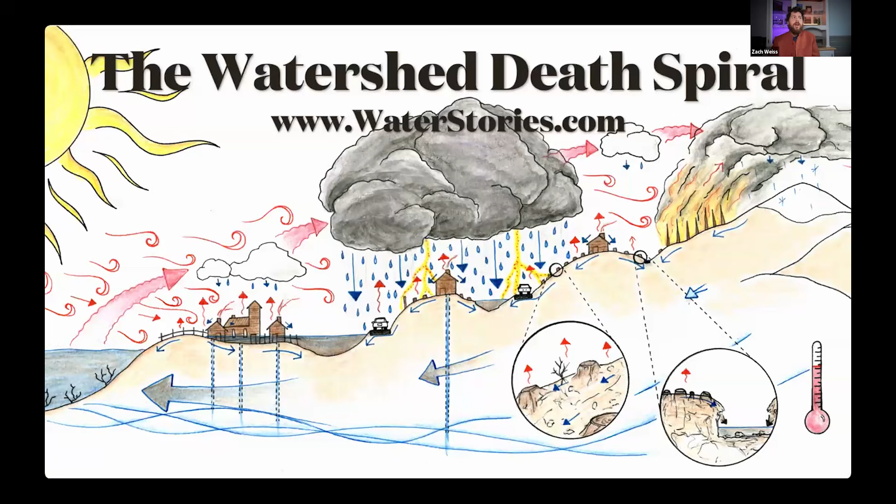With Water Stories, we're really working to empower as many people as possible to implement water cycle restoration. This is reversing drought, flood, and fire through partnership with nature. What this looks like on the ground is training people in in-person programs, in online programs, putting together films, videos, and stories. It's been really impactful to watch this community grow so quickly, represented all around the world already. It's because people are learning how to heal landscapes with water, how to work with natural resources to create more springs, more water supplies, more healthy landscapes, more habitat, to move from this watershed death spiral we're currently experiencing, these cycles of flood, drought, and fire, to a full, healthy, and functioning water cycle.

I'm really focused on helping people earn their living through healing the earth, something that all of these speakers here today are doing an excellent job of.

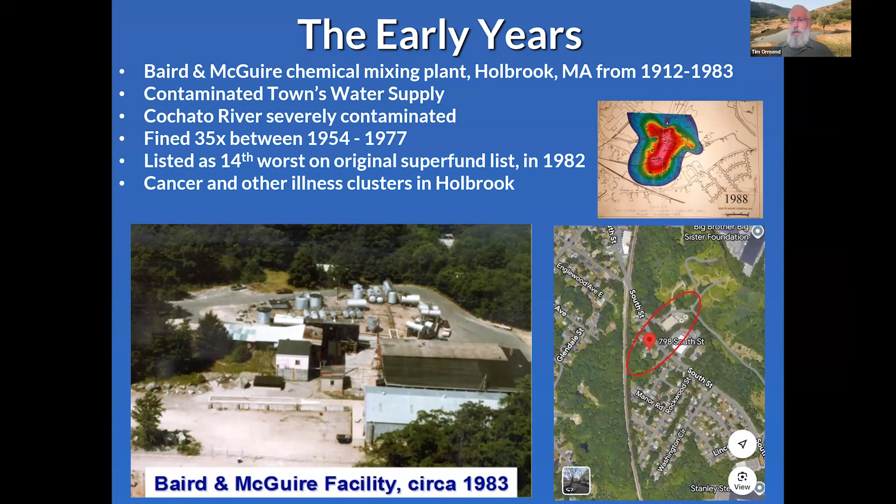And Patty Larkin wrote this song called Metal Drums about this story.

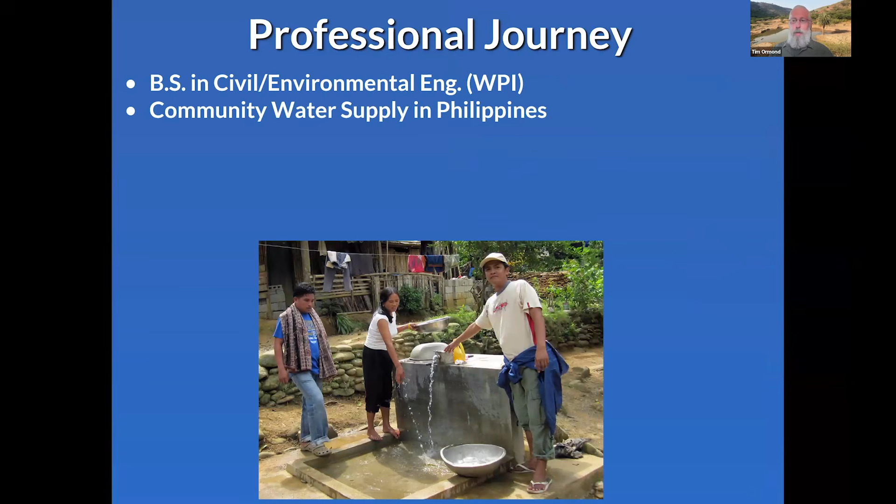Part of that, I think, led to my career in water. I was the first one in my extended family to go to college and earned a degree in civil and environmental engineering. I then had a real interest in doing community water supply work, so I did volunteer engineering work after my bachelor's degree in the Philippines, in Mindanao. That was going to be my career path.

I got a master's degree in civil and water resources engineering, and I focused my graduate research on developing countries and water supply. I worked with an international engineering firm, and then I got my professional engineer's license, currently licensed in several states.

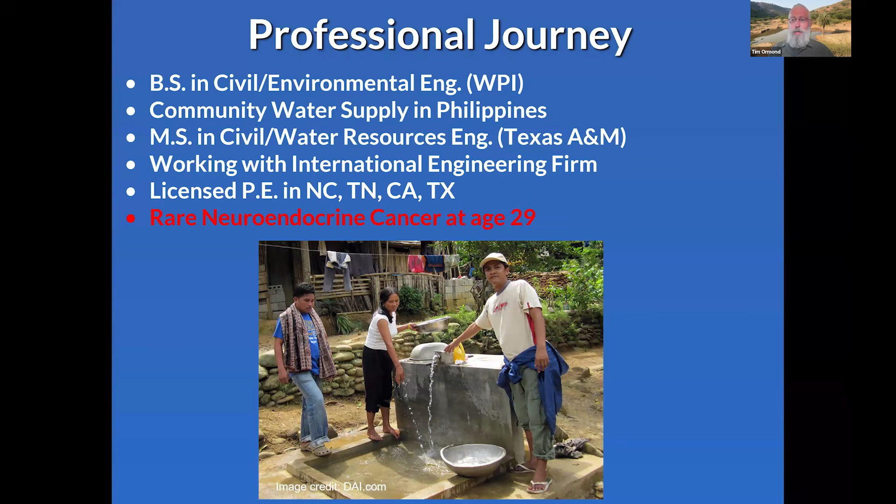And then I had what you could call a record scratch moment, where at age 29 I was diagnosed with a rare neuroendocrine cancer, and was told that the average life expectancy would be 2.5 years. So you might imagine that impacted me. I spent about a decade of my life working through that, trying to regain my health.

This journey of water can take you into sometimes low places and unexpected places, and for me it brought me deeper with water as part of my journey. I ended up moving to Asheville, this beautiful town in the mountains, considered a healing destination for a lot of people. So I landed here and started my own consulting firm.

Originally it was called Hydrocycle Engineering, then more recently called Blue Earth. I've had a focus on water and ecological restoration, mostly in urban environments. Zach and I talk about this sometimes—the needs in urban environments can be different than for rural environments in terms of design, permitting, and regulations.

Currently I focus on a lot of nonprofit work, helping environmental nonprofits locally and regionally with grant-funded projects. I'd also gotten certified in permaculture design and serve in various volunteer capacities.

In Asheville, I was elected chair of the Sustainability Advisory Committee, helping the city with issues related to environment and energy. And I'll talk about this a bit later, but I'm currently serving as chair of the Infrastructure Recovery Board. We had a major natural disaster here in 2024.

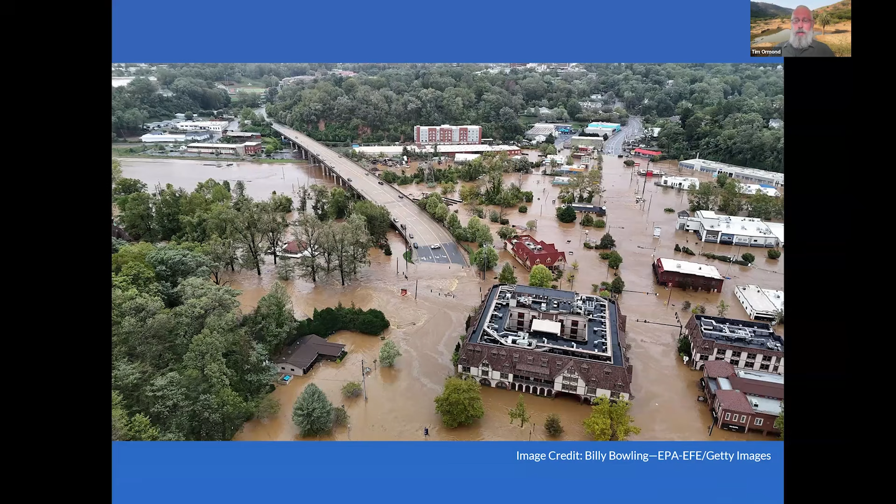In a crisis like that, you really begin to understand the importance of water.

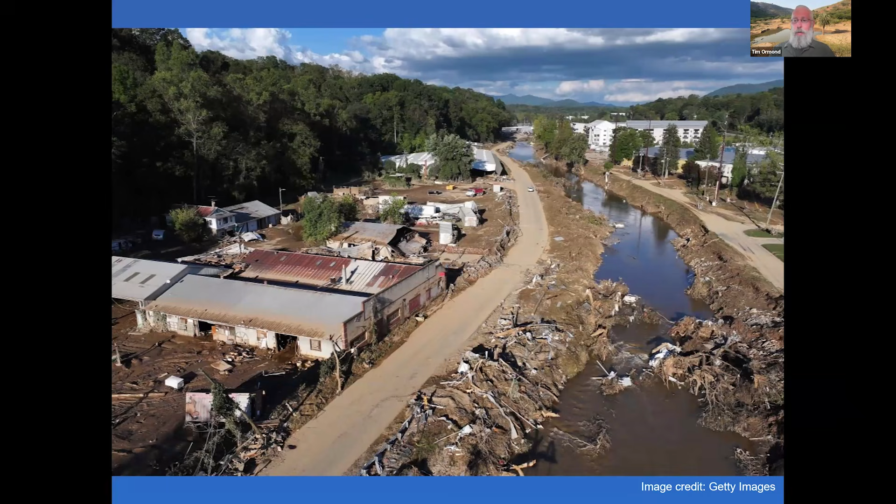These are some of the devastating aftereffects on the rivers and creeks. About 5,000 roads and bridges were washed out, including private roads and driveways. I'm currently serving as chair of the Infrastructure Recovery Board, helping the city plan its resources for recovery, which is still ongoing.

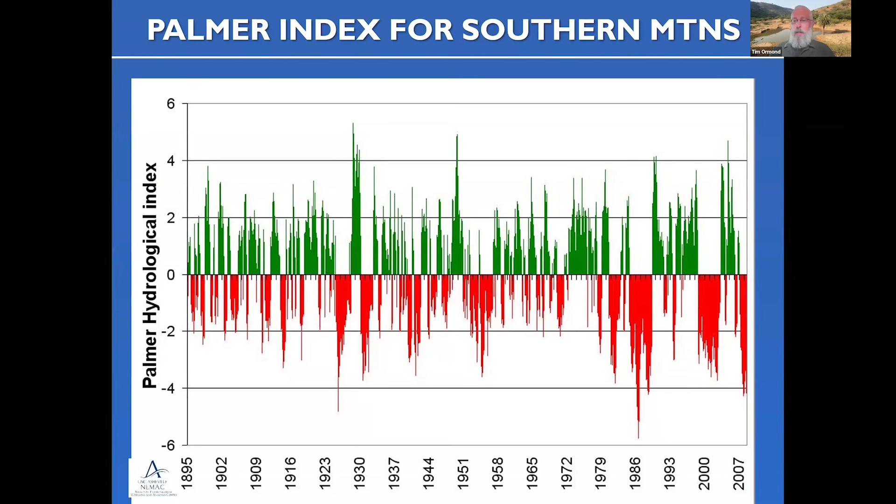We also have issues with drought and wildfire. They're not as common as out west, but every few years we do get wildfires in our forests. Over time, you can see these extremes—both flood and drought cycles—have become greater over the past 100-plus years, and they continue to intensify.

The Water Stories course really helped me integrate water and climate into my projects, and I wanted to share some of them with you. These are just a few current ones; there's a lot more I could speak to.

This one was a wetland restoration project. A film was made about it—I connected through Water Stories with Apollo Saldana, a local filmmaker also based in Asheville, and we collaborated on this documentary, which Water Stories has published. If you haven't seen it, I'd highly recommend it. I'm interviewed in the film as well.

This project transformed about an acre of underused asphalt parking lot at a local community college into a wetland education park, practicing water cycle restoration as part of the design. In urban projects, we often go through a detailed design process involving engineering, permitting, planting plans, and detailed hydraulics. Working in an urban landscape is different—it's not for everyone, but it's an important niche since so much of our world lives in urban and developed areas.

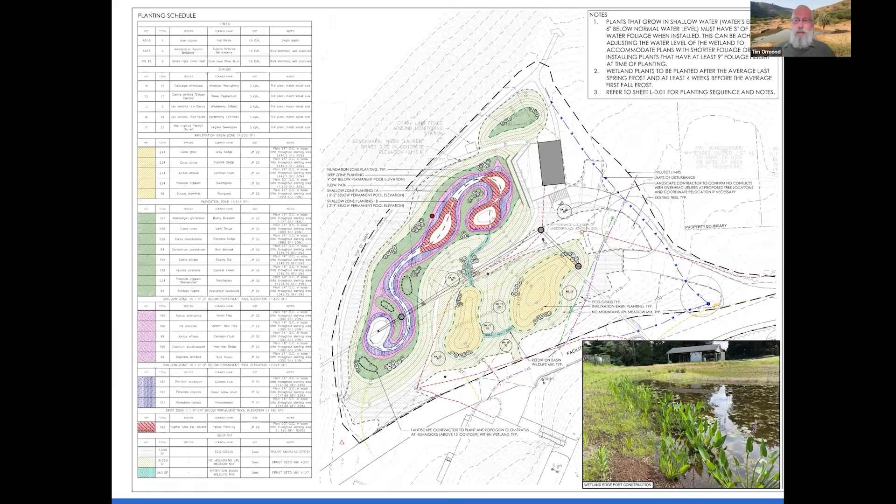This part was unexpected too—as we began excavating and uncovering the soil, we discovered it was contaminated. Truckloads of soil had to be brought to a special site for remediation.

The project will be moving into phase 2, which will involve a permeable parking lot and a teaching area. We'll be working on that design in the coming weeks and months. Here's the before and after—unpaving a parking lot and putting up a paradise.

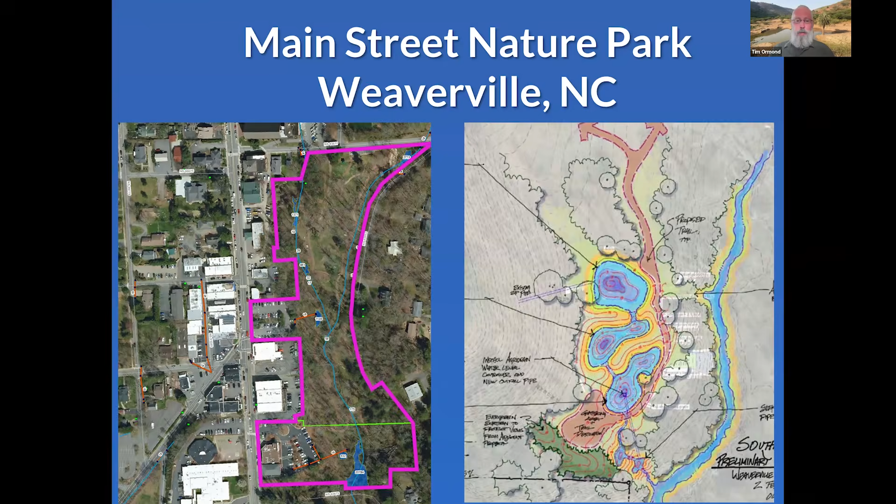Another exciting project I'll mention briefly: I'm the lead author on a community guidebook on water cycle restoration. Our current title is 'Water Connects Us All: A Community Guidebook for Restoring Mountain Watersheds.' It will have a lot of guidance, design guidelines, action plans, as well as some model policy templates that communities can use. Our hope is to really engage many different communities, including the climate action community, in water cycle restoration in our region. This will be published later this year, and we'll be sure to let you all know.

Something that was really profound for me, I'm still trying to make sense of what happened exactly. Back in January, a good friend who lives in Bangalore, who grew up there and I know from Asheville, and I had planned a trip to visit him. I'd never been to India. So I booked this trip, and then a few weeks later, Zach at Water Stories announced this Water Sutra, and it just so happened to fit exactly within my existing trip. So I said, this must be for me, and I signed up.

Part of my India journey involved about 2 weeks in Rajasthan with Zach and 30 or so people from around the world, walking with Rajendra Singh, who's known as the Waterman of India, and his organization Tarun Bharat Sangh, which I think means Young India Movement.

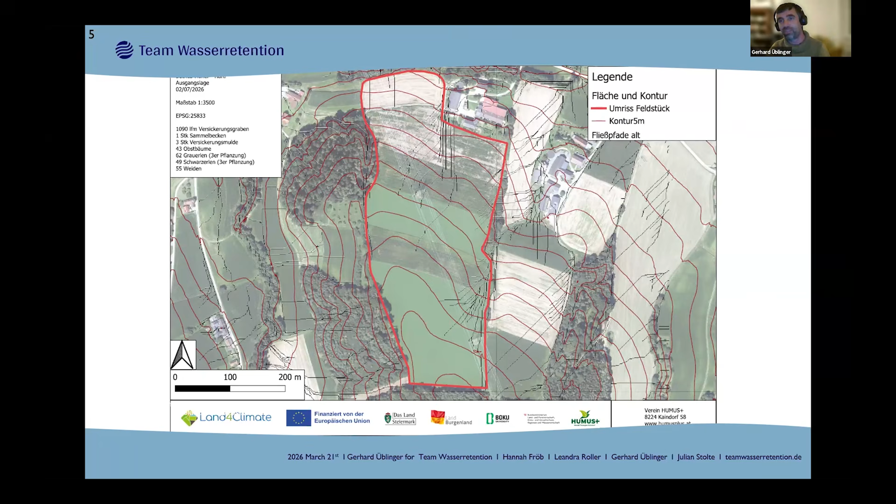After finding out all this stuff, I go to the next step and try to integrate these keyline structures in a way that, when the farmer sits on the tractor, he wants to go straight forward and not turn around quite often, he doesn't want to stop. He just wants to go there and back, there and back. If it's straight, it's easier; if it has curves, it's a bit more challenging. But the most important thing is a long way down and a long way back. So when I do designs, I try to even make the long way down longer for the farmer, so it's more practical for him.

In some fields, like here, you can see it — when you follow the contours, you get a different shape of the parcels, creating this longer way down and longer way back. So it's sometimes even more effective for the farmer to go these curves than to go back and forth the short way like he did before.

As you can see, in the bottom is the top of the ridge, and next to the house is a small creek taking all the water. So we try to really start at the very top and harvest all the water flowing down, bringing it down to the ridges where we create small infiltration basins also. We decide where we allow this water to overflow the swale — not everywhere, because we want to steer the water where it's needed. We try to get it out to the ridge, away from the places that are already wet, and spread it as wide as possible.

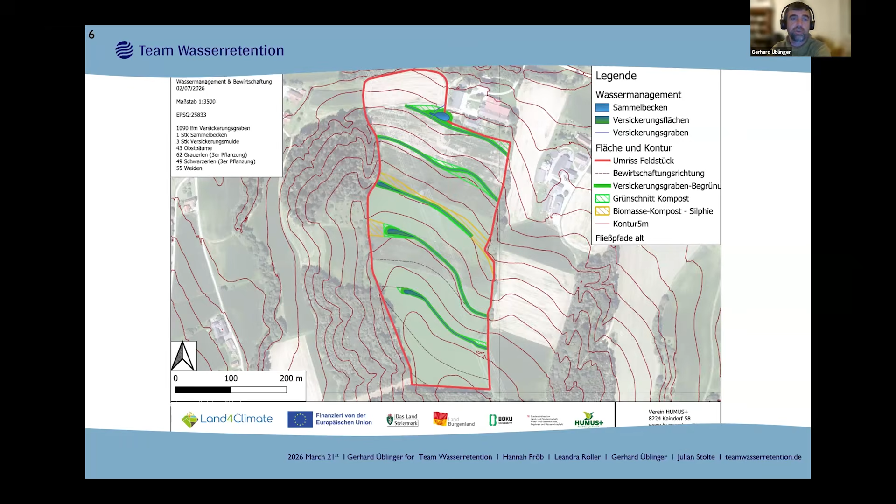And in the bottom, there's a small permanent water body. You will also see how it works. And after this, we plant the berm trees.

So this is something quite common. There's different plantations. Next to the house, often we use fruit trees, a bit further away but in good reach, like chestnuts we have here, and the rest is fiber trees and trees that create energy from them.

So here you can see also the gas pipeline going through.

So all these structures are aligned. We have this key line structure that is practical for the farmer to mow, but still it uses 5 to 15% of the field, of the area. But it's productive because there are the trees. And this combination is interesting for the farmers.

The implementation is costly, more costly than just farming. This is true, but it has a return for the farmer himself within a time period of 20 to 40 years, depending on the trees.

But for the whole economy of the state, this system replaces itself within few years. So when I do my research, it says between 3 to 6 years. If we would put this on all the farms we have, the devastation that is not taking place via floods, via lost fertilizers, via lost soils, would repay this within few years. So there's a very clear use case, a very clear business case in it.

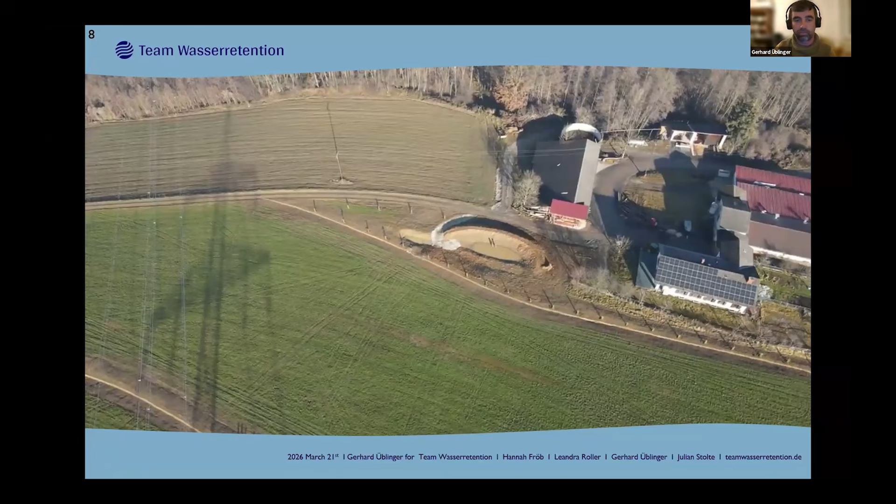So I will now be a bit faster. Then there's another one that I would like to show. Maybe you remember, we had this 4 years ago already in a Q&A when I asked you if it's possible to build a pond down there.

And they had a mudslide coming in. There was a heavy rain, we had this mudslide coming in, rushing through here. And here on this small ridge, they had a drought situation where they couldn't plant fruit trees because they were all dying in the sun. So the aim now was to get this excess water to where it's needed.

Back then when we talked about building a pond here, it wasn't possible because all the water needs to rush through here. If you don't get rid of this water, building this pond would need a spillway so big that there wouldn't be a lot of space for the pond itself.

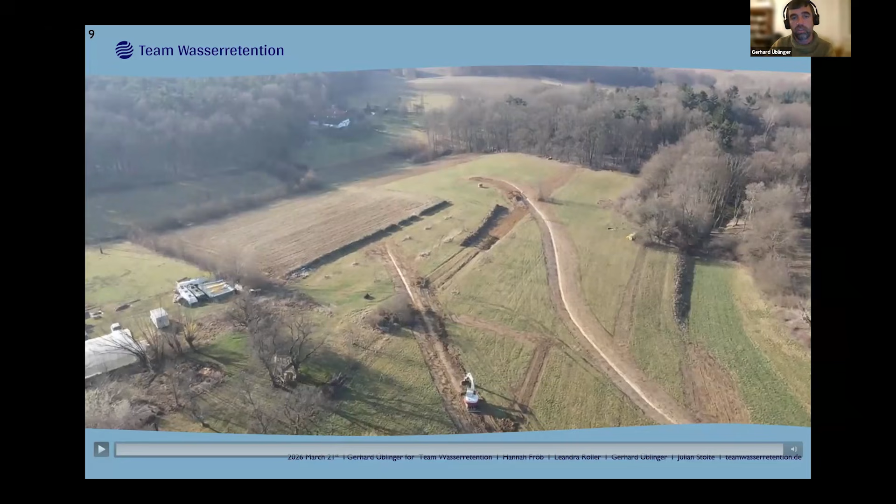Also here, this whole system—let's go back again—this whole system was built within 4 days. So also here we tried to really be fast and get in and out, to also not disturb the agrotourist season for them.

And here there's another flight just to make visible how the swales look after implementation. So we now fly along this contour level swale. As you can see, there are marks for the digger to drill the holes on the berm. And everything you see is like cut, loamy topsoil.

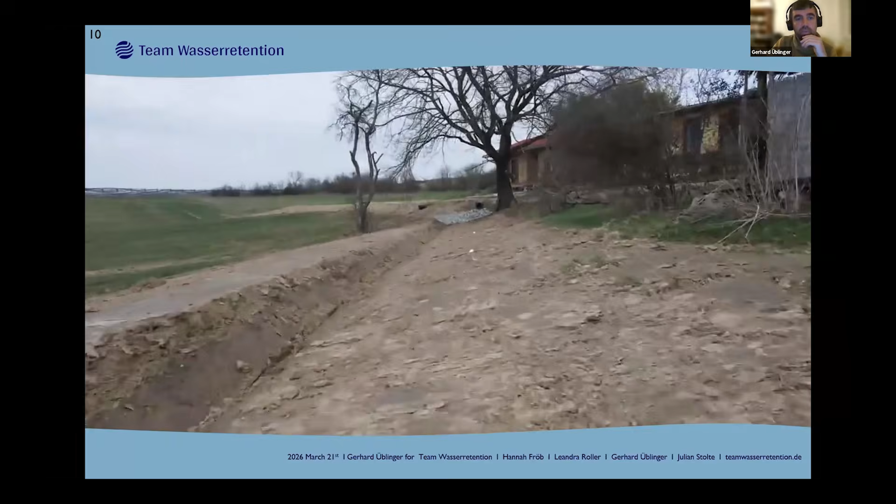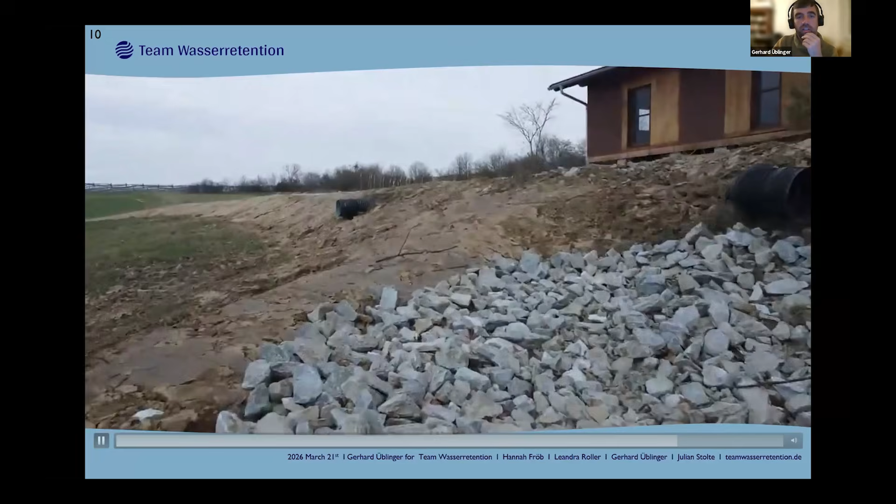Right, so these are the big scope projects that I do. And it's also a webinar for people trying to understand if the Keyline Course is the right thing for them. I couldn't imagine doing a project of this scope so fast. So for me, it also was like I need to get into this, and there was a lot of learning on the way. The learning curve was very steep in the last 4 years.

Like whenever I wake up in the night, I have something to think about. So if you don't want to have it that steep, I can understand it. I just had this luck, and I had to take it.

Before I came into this lucky situation, I was also working with a different skill that I brought from my past. I was working with kids before. So I decided I want to also do something else that is more on the social level, which is also teaching people what we need in terms of water and land use.

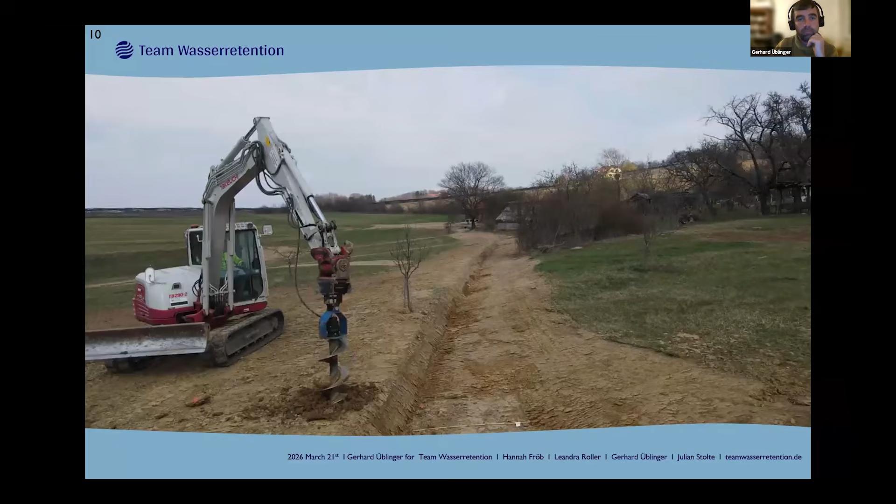So I started dam-building workshops with school children. Most of the pictures come from the school that my son went to. So I had a perfect situation: the land is ours, where the creek is flowing through, and I had the pupils that were my dummies to test whatever experiment I did, and they loved it.

They just loved it. We have a small sawmill in the neighborhood, so we took the rest from the sawmill and just built something somehow into the river, into this creek, and the children had big fun.

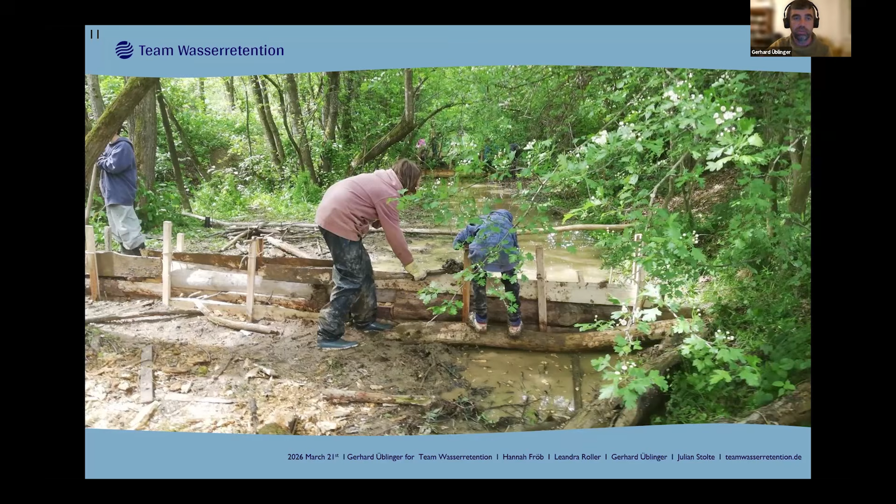Unfortunately, I don't have a picture of how it looked after the first strong rain, because all these structures were washed away. So after seeing this, the class came again. We said, okay, we need to do something else, this doesn't work. So we continued and started building this small-scale beaver dam-like structure, just putting piles into the ground and weaving willow branches into it, trying to find out what happens if you do it like this. Will it be washed away as well?

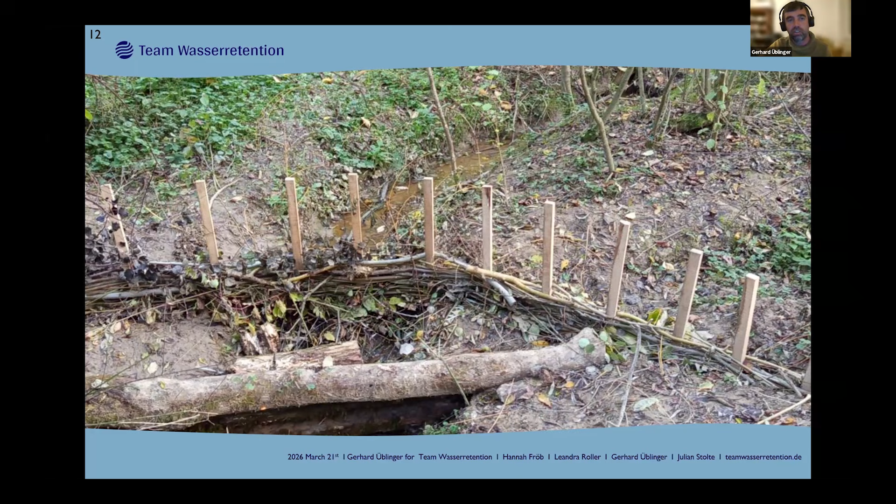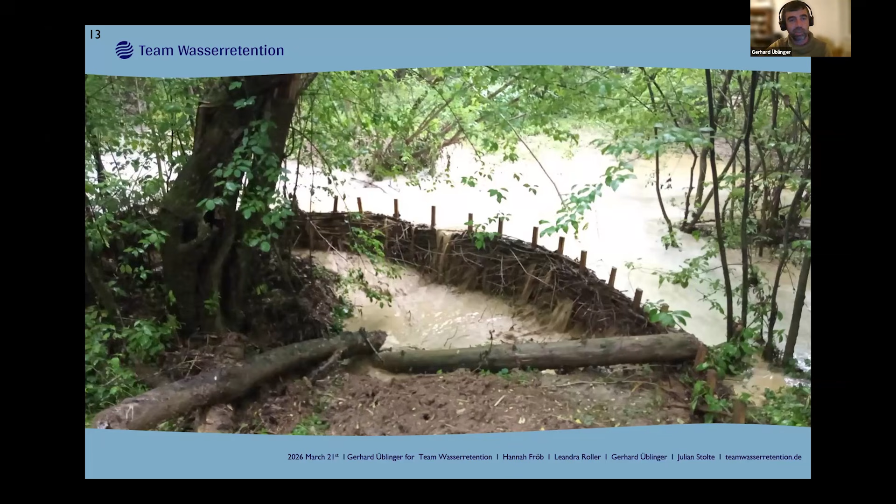So we had I don't know how many tons of soil lying in the back. The children were stepping through with their feet, getting stuck, losing their boots in the mud. And so we could really understand together, okay, this is what is happening when it's raining and we have erosion. Soil is washed away, usually we don't see it, but here you can see what is happening.

The structure is still there, it's still doing its job. And the very interesting thing is that it clogged more and more, so now we have a kind of wetland situation in the back of the structure. There is mud and different vegetation starting from scratch.

And so we built more and more of them. Whenever I go there, sometimes I see children coming around the corner, curious what has happened to their dam. But not only them - I also started showing this to people from the local government, like the mayor, and them seeing what happens there and how simple solutions can be made led us to come up with a project together.

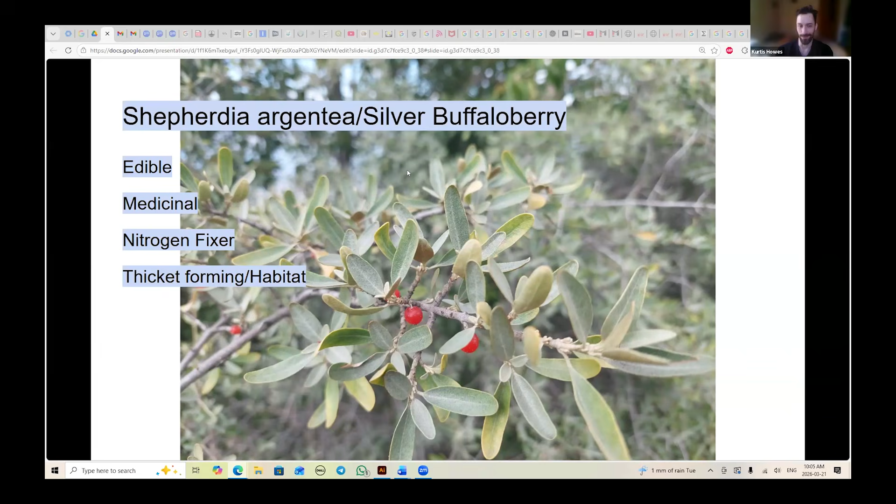As I was going through Alberta, I came across lots of cool plants. This was Shepherdia, or silver buffalo berry, and it's one that I've read about a lot and would like to implement in projects here, but I feel like it's too wet for it here. It has tons of cool benefits - edible, medicinal, fixes nitrogen, forms thickets, habitats, and you can use it for food and jellies, and you can make like an ice cream type substance with it.

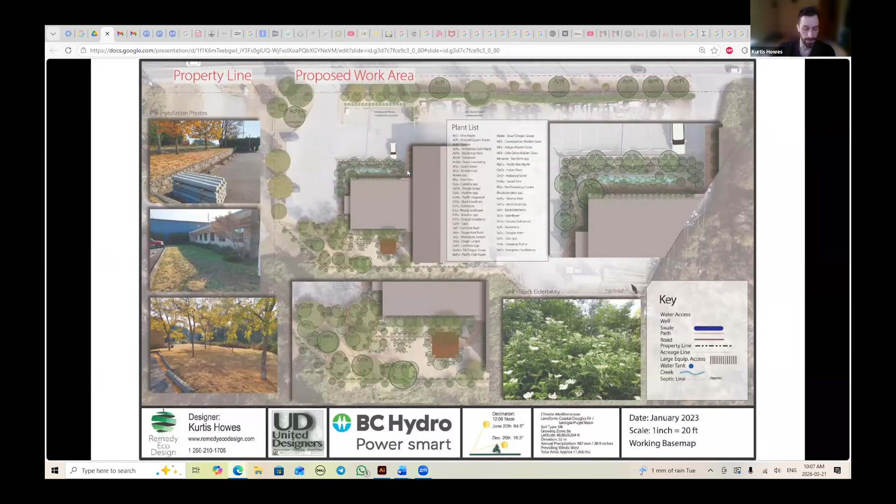This was the first project I started to implement water systems into, and I just started small. You can see there's a small rain garden on the right, and a bunch of native plants within that to try to build up the ecology of the area.

In 2023, they were forced to stop using their water because of some licensing issues. Eventually by the end of that year, they were able to use their water again, but they were told to stop in summertime when they needed it the most. I read about this in the paper and decided I could help them try to catch and store water on the land instead.

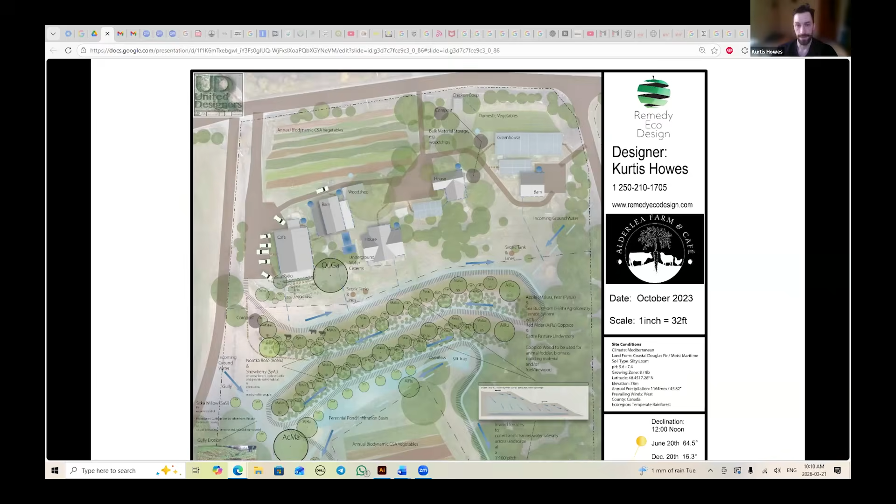This is the other half of that. I also recommended having a hazelnut and honey locust coppice agroforestry system, that they could utilize the wood for building fence posts or other structures, or use the hazel as tree fodder for any livestock they have.

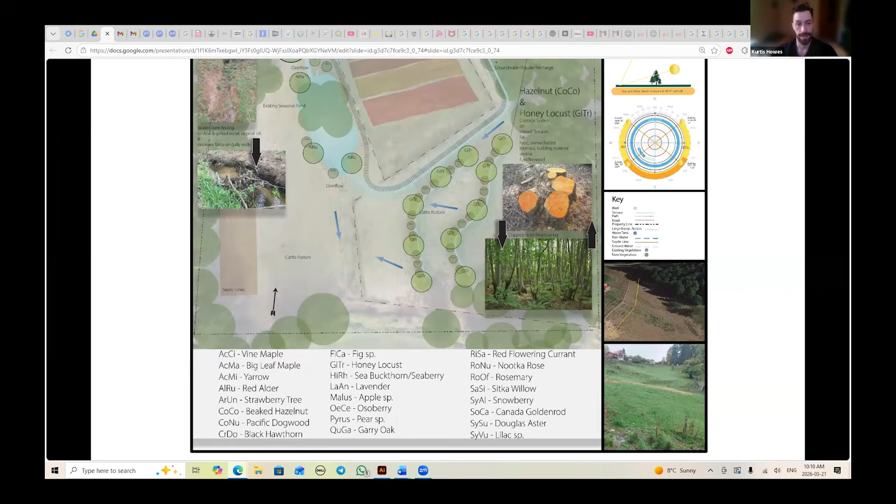After this, they applied for a grant to do a dugout on site, because they haven't installed the terrace system I designed for them, but they have installed this dugout. After I did the design, they applied for a grant, which they got, and I did the specs for the dugout. It's a lined basin, and it's totally full of water now, so they can use it to irrigate their crops in the summer.

Hopefully in the future they'll implement the terrace system I've designed as well. This is just more of a close-up for that.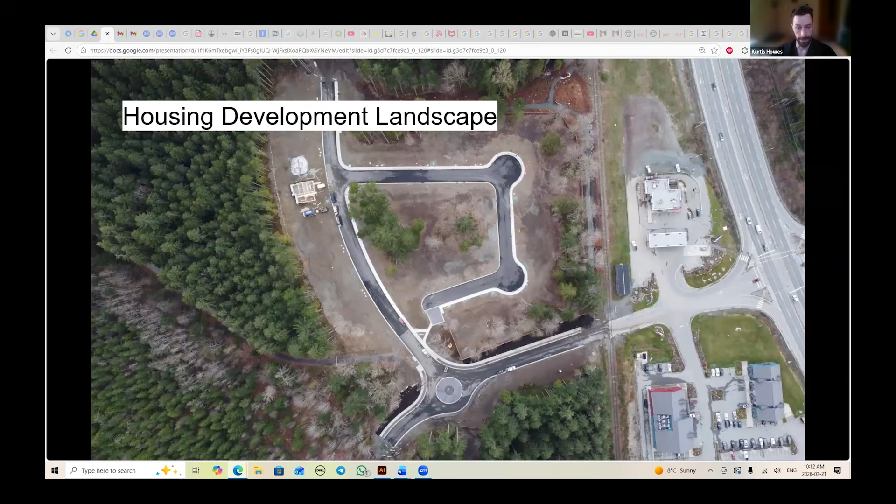Moving on, this is a housing development project I've worked on. This has since been constructed a lot more. There's still some spaces that haven't been built yet, but there are a lot more houses in here now. I did a design for a little entrance corner space, using primarily native species, and certainly boosted a lot of the beautification factor using magnolia and flowers and stuff like that too.

Anywhere I can, I always try to incorporate some sort of water body, even if it's a small retention basin or rain garden. I have that listed in this design, but I find it's sometimes hard to convince people to implement these things if they already have a set idea or don't have an initial interest, because sometimes they're like, what's the point, right? So a big part of what I do is talking to people about the importance of even small catchment systems and the amount of habitat they can create, let alone the rehydration ability they have.

So, designed this. Unfortunately, they did not go for the rain gardens, but it's okay, we still put in the planting scheme, and I think it turned out pretty nice.

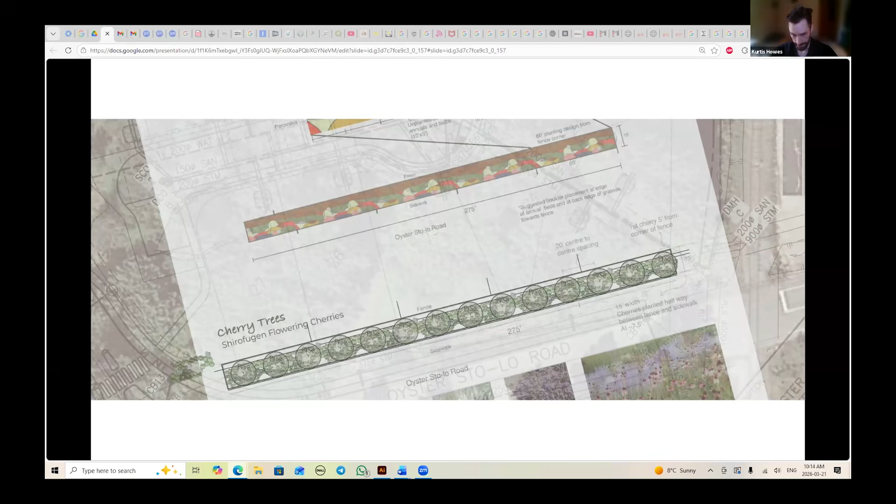So this is along the entrance way in, and this is the planting of that, which I think turned out really nice as well.

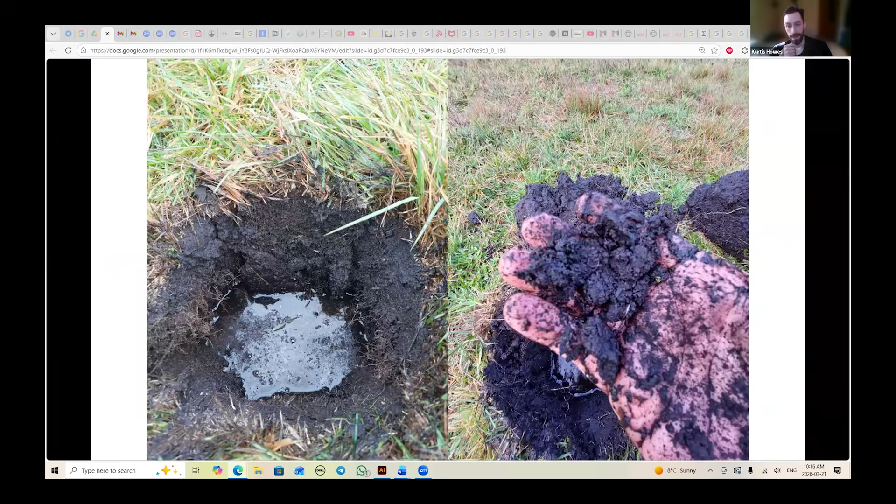So I designed this Chinampa-style food forest, which she wanted, along with some more row planting or agroforestry type systems. The blue lines on the right would be the channels to excavate, to hold water and slowly drain it into that marsh land already there. But there's so much in the winter, it would just be standing water anyway.

Then I'd take that excavated material and use it as mounds to plant into, to keep the roots out of the water. In the back right, I used a lot of plant species that can handle more inundation, like crabapple, for example, that we could graft more palatable or larger cultivars of apple onto. So I could leverage the use of a wild apple species and then graft a more edible species onto that. So yeah, this was fun.

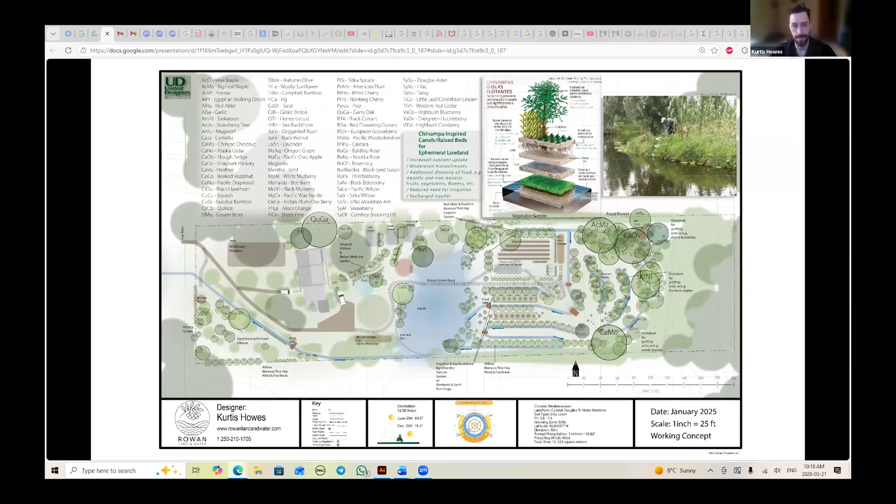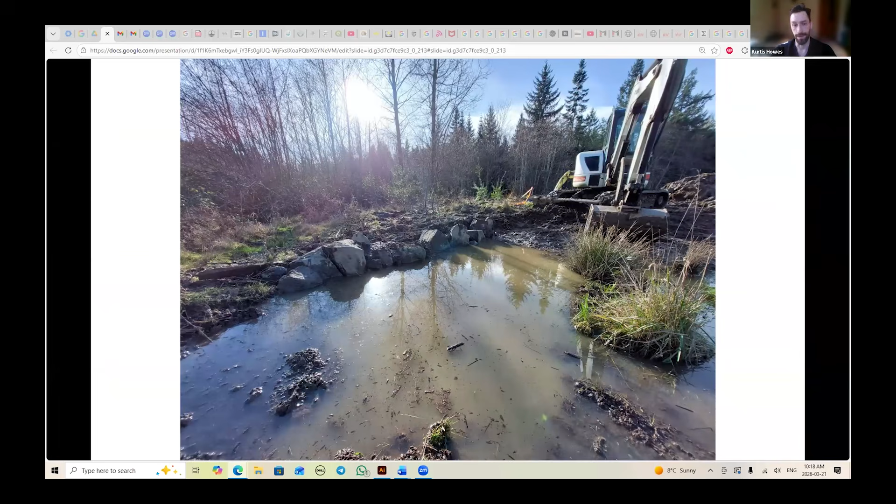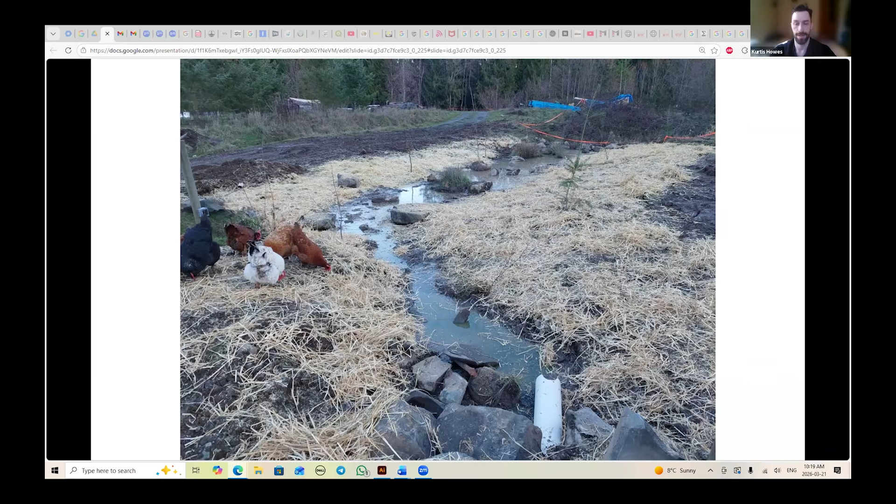And then here's some excavating work I've done. This is a small filtration system fed water from a building nearby, and I put in this little rock check dam to hold the water back, to filter it before it enters a pond further downhill. Then I mulched the edge, seeded it, planted conifers and alder to help shade the water, keep it cooler, and build up the soil as well. That was fun. Here's another photo.

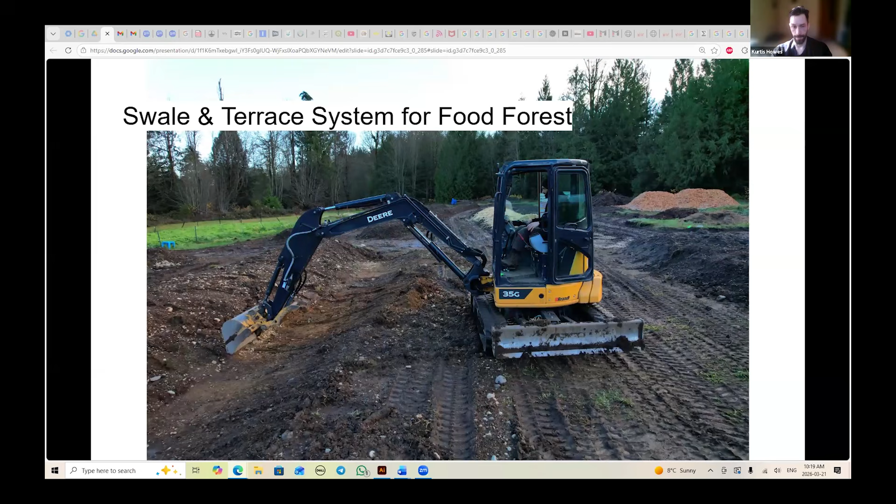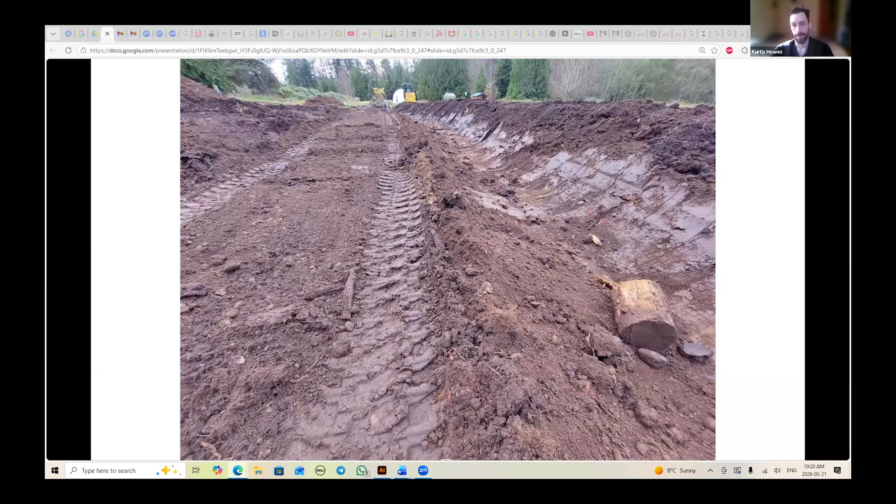And then here is a swale and berm system I worked on for a woman. This project started out with them hiring someone to place the mounds, but they actually weren't fully on contour. So I went in and shot the site with my laser level and saw that a lot of these mounds were off a bit, sometimes up to a couple feet. So I fixed that by marking them out and recutting each little channel before the mound, actually on contour, so it would hold water level and hold it better and not let it run off so quickly.

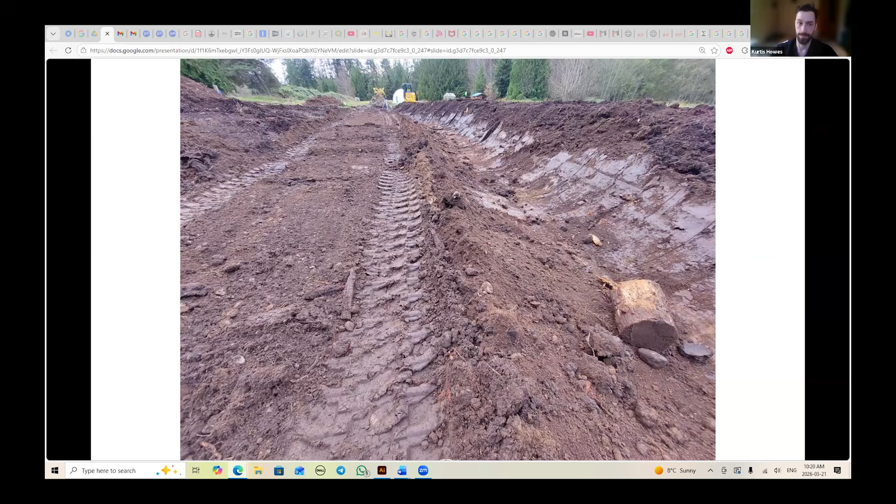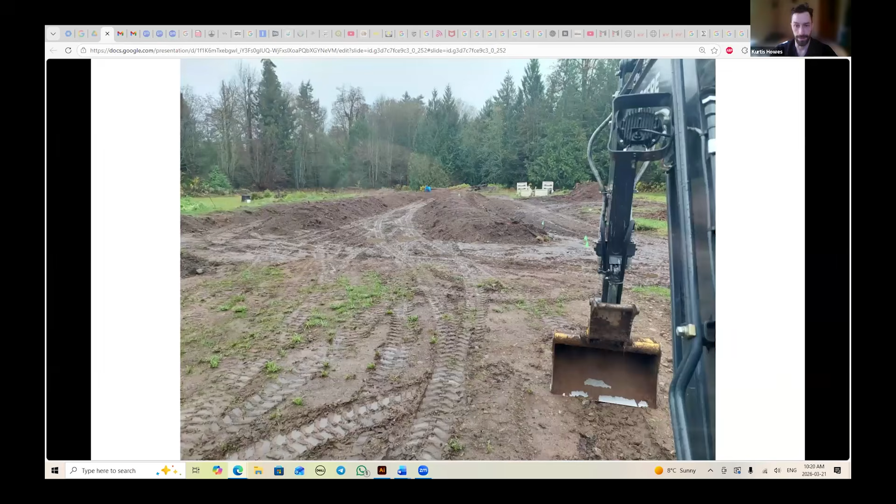And then I used the overburden on top of the mounds, as well as built up the actual roadways, which you can see on the left, because they were quite sloped before. I wanted to level them out and create more of a terrace system and an access point for each swale mound. So here's some photos.

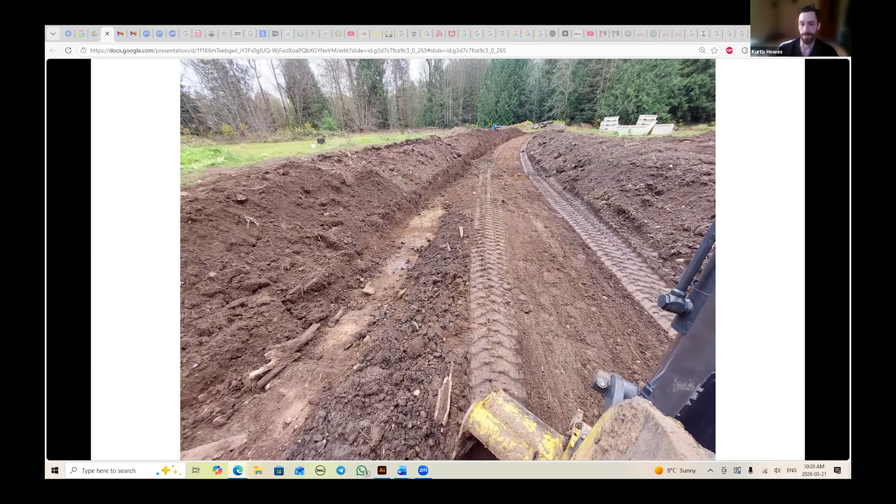One of the biggest things on this site was seeing how tight the space was. Since I didn't place them initially, I saw the importance in planning ahead and always giving yourself enough room for access, especially if you're going to use equipment. Because between some of these mounds it was so tight, and I wasn't able to do a very big channel before the mound, and it became frustrating at times. I just realized the importance in planning ahead and giving yourself ample space if you have it.

Here's one of the channels after rain, and some of the soil and manure that we were adding to these mounds to plant into. Sierra designed this system that I was helping to fix up a bit, and here are the spillways for each of these channels as well.

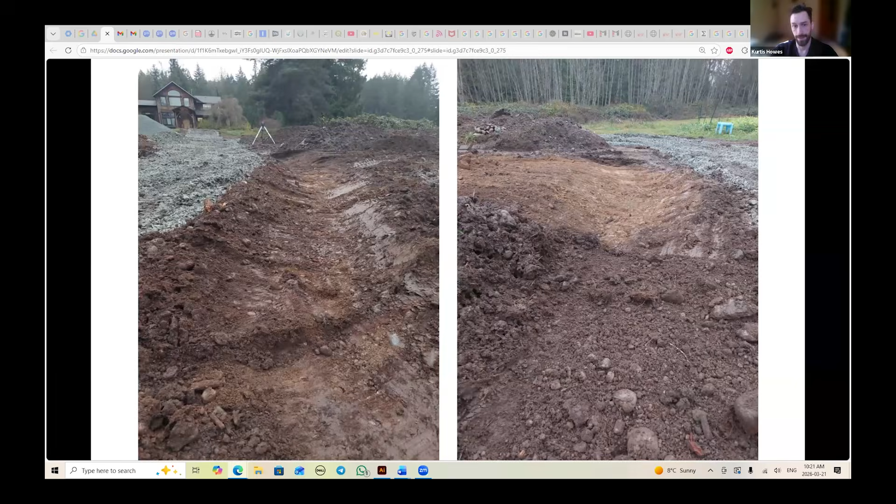So we cut in a level sill and ran the spillways down alongside the road. My portion of the project ended here, but I let them know to fill these up with rock to keep the spillways from eroding, and also to give them somewhere to access, drive, or walk across. So yeah, that's that one.

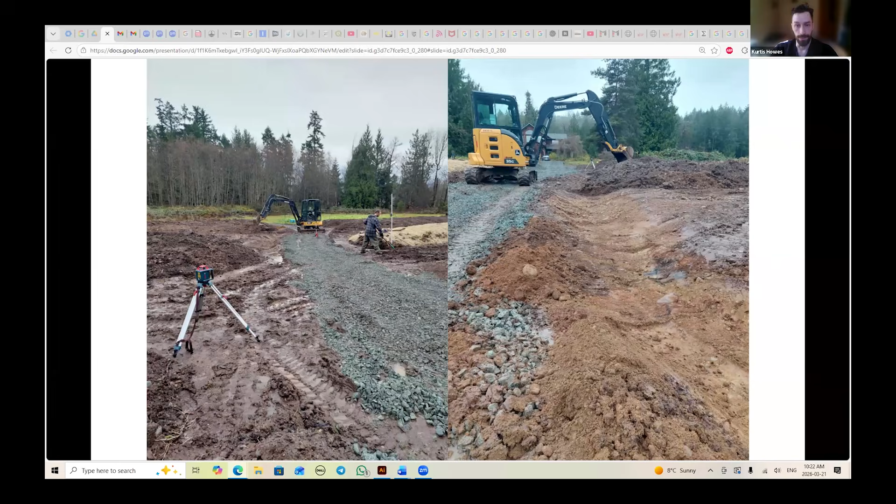Here's some more photos of the channels filling up a bit with even just a little bit of rain, so holding water, which is good.

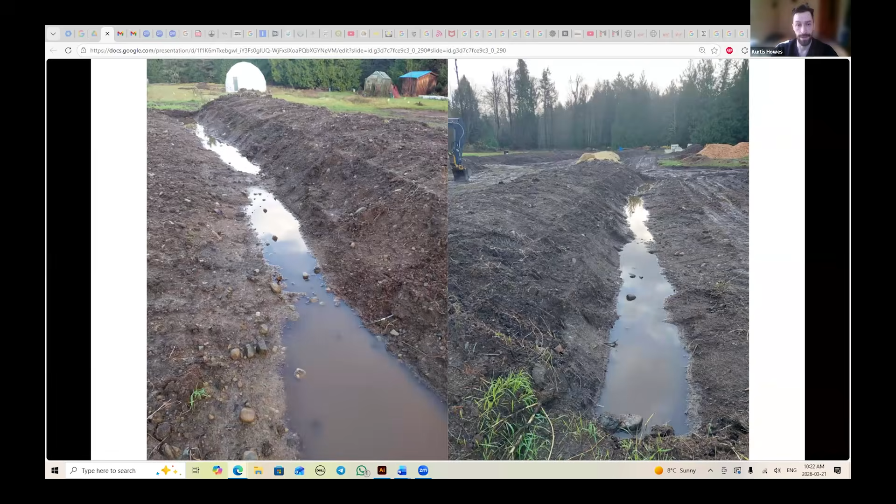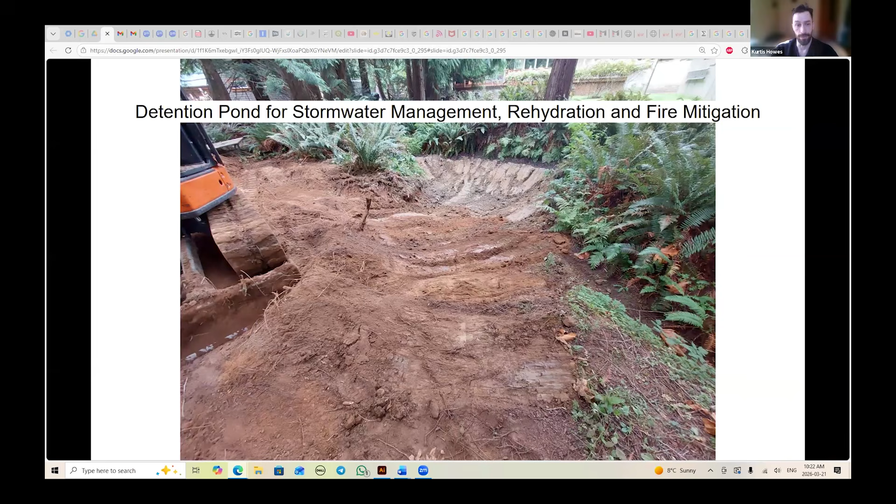Moving on, here is a small detention pond I put in for stormwater management, rehydration, and fire mitigation. This was just a fun little basin I put in that was fed by the house you can see in the background. There's a pipe running off of their roof that catches rainwater that flows into here, so it fills up really quickly after even just a little bit of rain.

I then used a lot of the overburden to build a little road through the woods, because the only access point other than this was a little walking path on the left. I just wanted more space and to get the machine through more easily, plus I had a ton of fill to use. So I figured I'd just make a little road, which is always fun.

It filled up approximately September 26th, and held water, then dropped around 2 feet approximately August 6th the next year. So it stored water for around 9 to 10 months of the year, which is great, because otherwise it would have just run off, exited the property faster than it needed to.

It would have alleviated—it wouldn't have given them the fire protection that they were desiring. So I think that's cool. This only took a few hours to do, and it's that much more water just being held in the ground. So yeah, that was really cool to do.

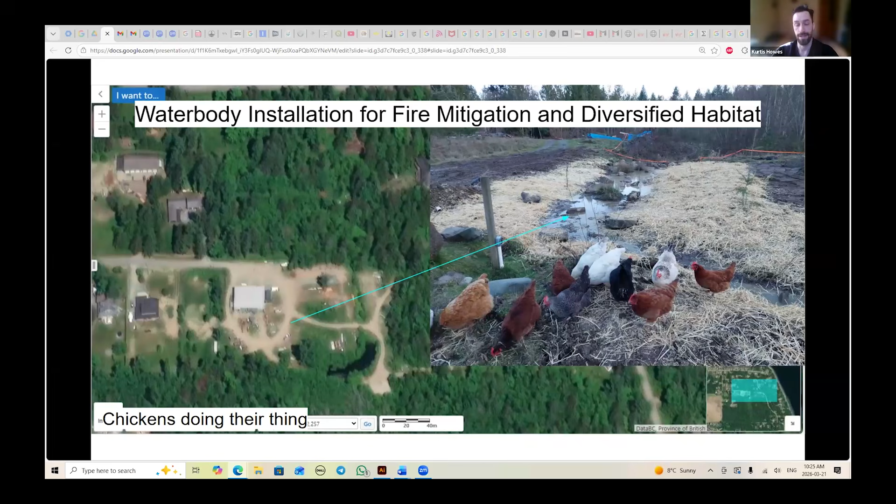The ponds at the bottom right of that image overflow into the pond that I put in the next slides here. So we intercepted that ditch and drainage system, and instead put a basin in so it would hold that water.

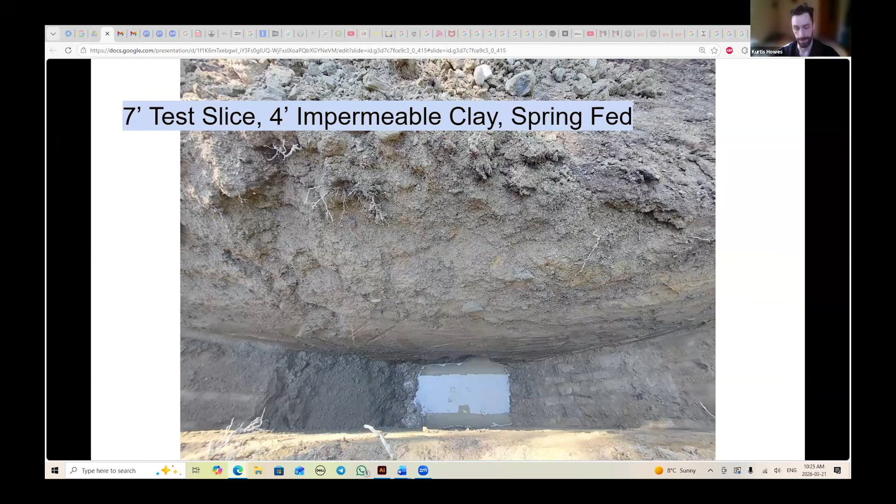When I started this, I dug a pretty deep test slice. It was about 7 feet till they hit bedrock, and there's a solid 4 feet of impermeable clay to tie into. So it was really good material to work with, and I knew there was good potential to hold water on site here, plus there was a lot of water moving through it already.

We started with building a silt trap that the ditch from the other property runs into, so we intercepted it to catch any silt and contaminants before it hits the pond that we were installing.

Darcy was working with me on this and was amazing, just went full bore the whole time. It was just him and I doing this project, and it was great—a lot of work, a lot of fun, super hot. I think it turned out really well.

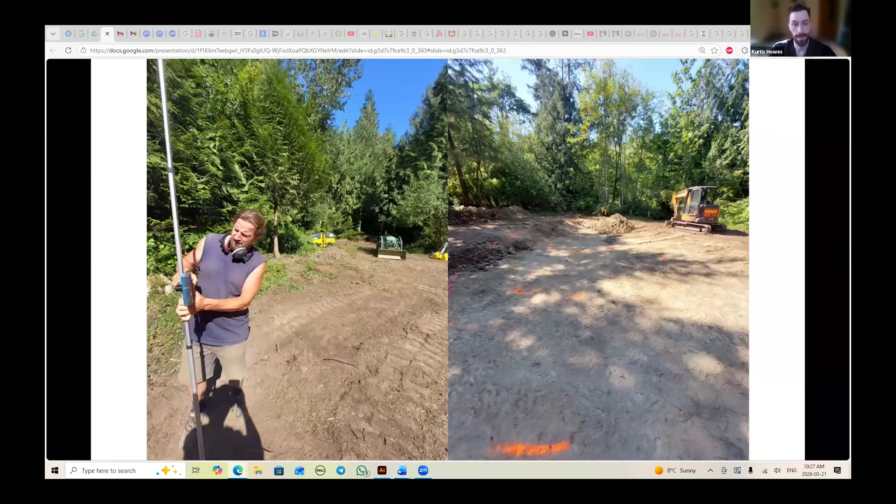A lot of marking, just kind of roughing in approximate dimensions, getting measurements, stuff like that. Checking level on each end of where we were going to cut in the key for the pond. The photo on the right is when we first started digging in the key—some more marks and general dimensions of what we were going to install.

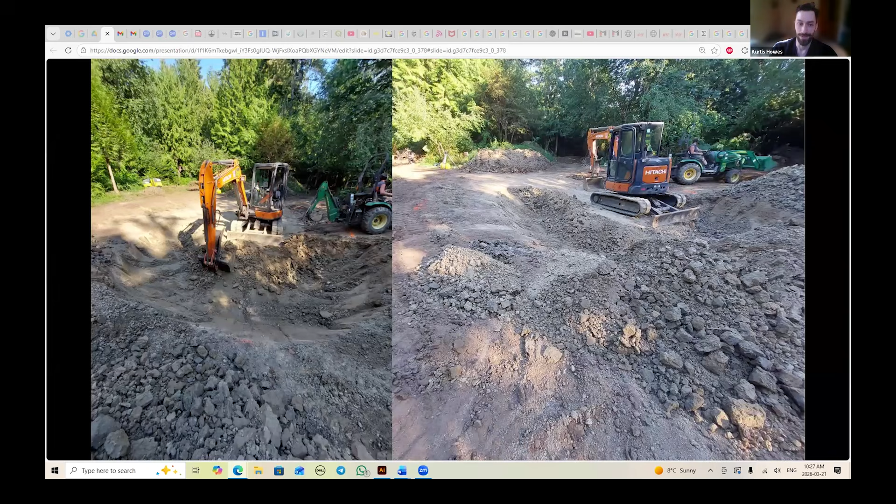So at this point, the key was open, and once we started digging in we saw how much material was going to be lying around. There were just so many piles of clay, and we separated the top layers of soil and substrate, keeping that separate from the deeper material. That deeper stuff was more impermeable, and we wanted to keep the higher density clay for the core of the key. You can see here how tight the project site was, with growing mounds of material to work around.

We tried our best to store things out of the way, but not so far that it was out of reach. We also tried not to chase our tails and move material around more than needed, because that was an ongoing thing until we started using it up in the key.

Where Darcy is on top there, that was our mixing station. We kept a little platform to mix, close to the key itself, so we could take the excavator, swing it around, and dump stuff in. It was a pretty efficient system, and a cool process to work with, hydrating the clay to the right moisture content to compact properly, because you don't want it too wet or too dry.

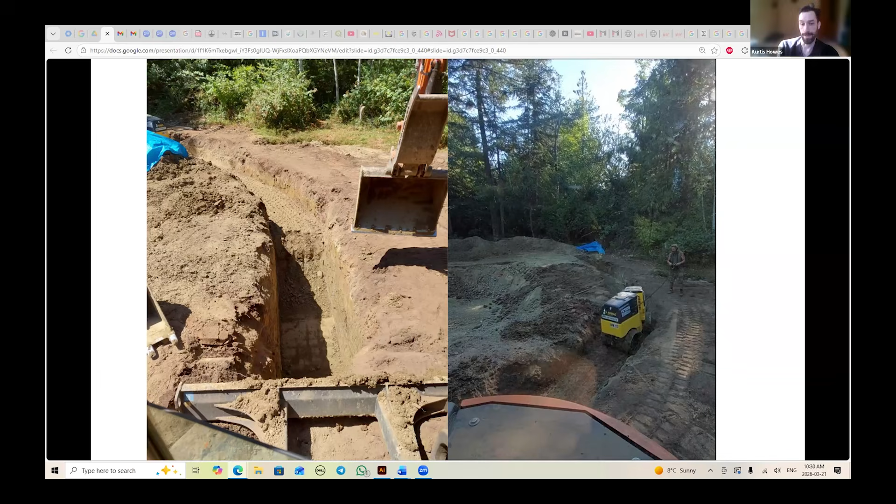Here's the key. We had to build it in sections, so part of it's built up and then we connected it in the middle. You can see on the right there, Darcy running the remote sheep's foot compactor.

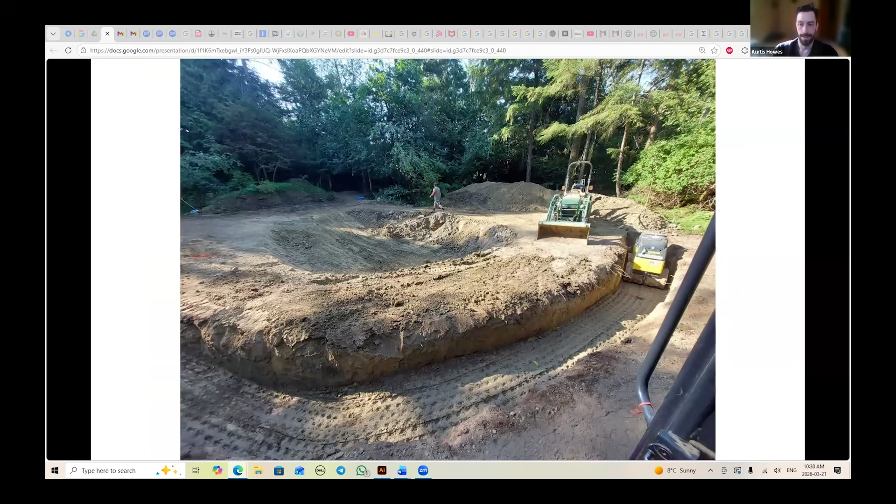Here's another photo. The key is slowly coming up bit by bit, and there's also less material to work around at this point, so there was more room to move, which was nice and sped things up.

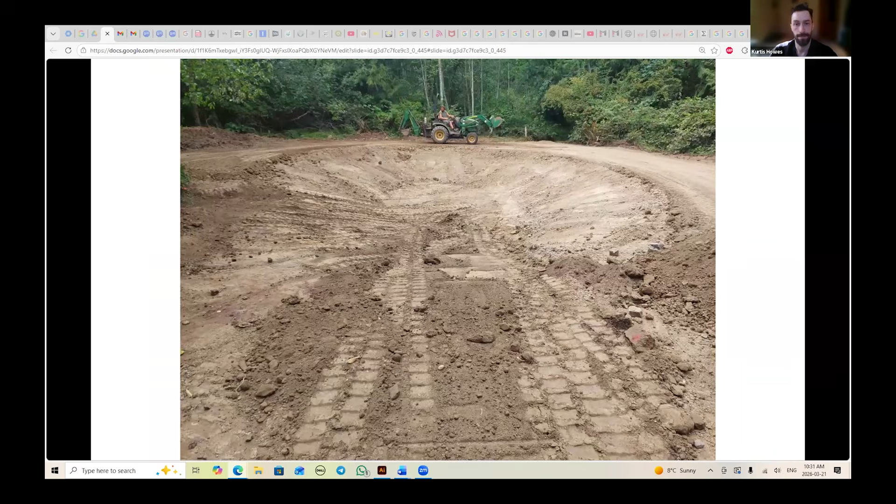So that's where we are, up to grade. And then this is at grade still.

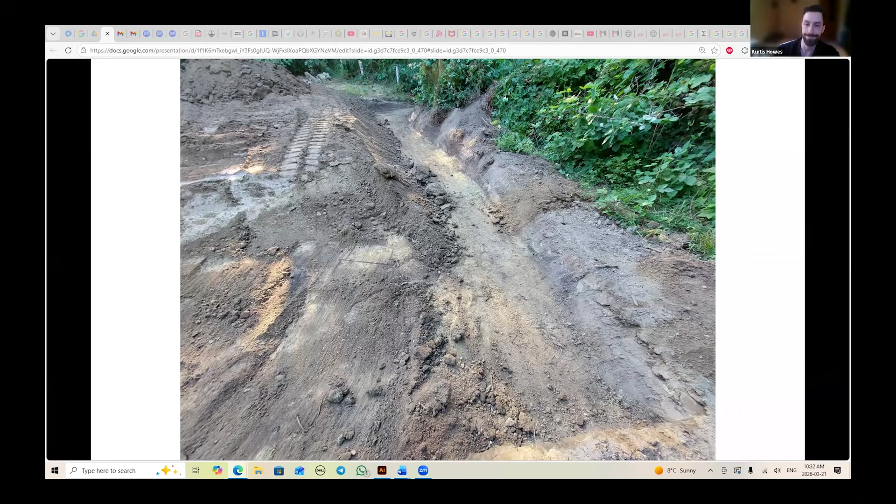We had some mechanical issues—some hydraulic lines blew on the tractor—but thankfully it was a pretty easy fix and we got it up and running again.

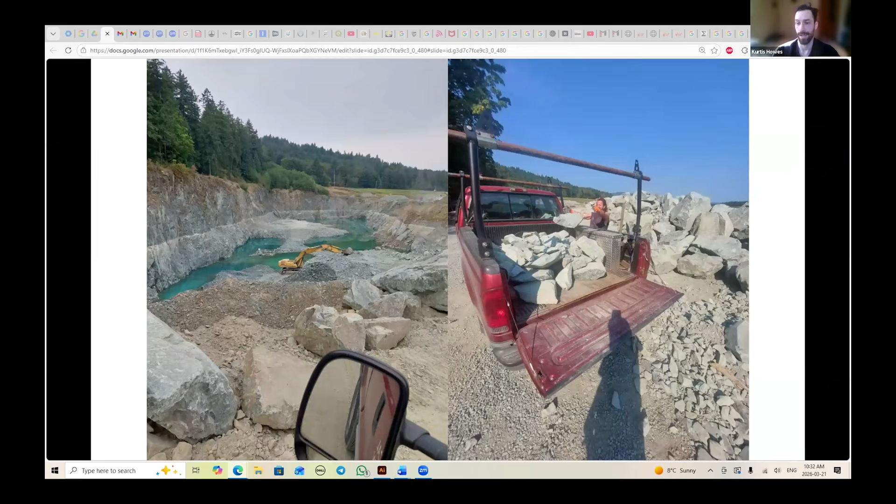After that, we went to the quarry and started collecting blast rock to rock armor the spillways with. This was a very labor-intensive portion of the project, done truckload by truckload because there wasn't good access to the site. We had to bring them in with my truck nearby, load up the tractor, and then drive them through the woods to get to the back here.

This took a little while, a couple of days, but we walked in each piece, very much like a puzzle, and then tied everything together with gravel.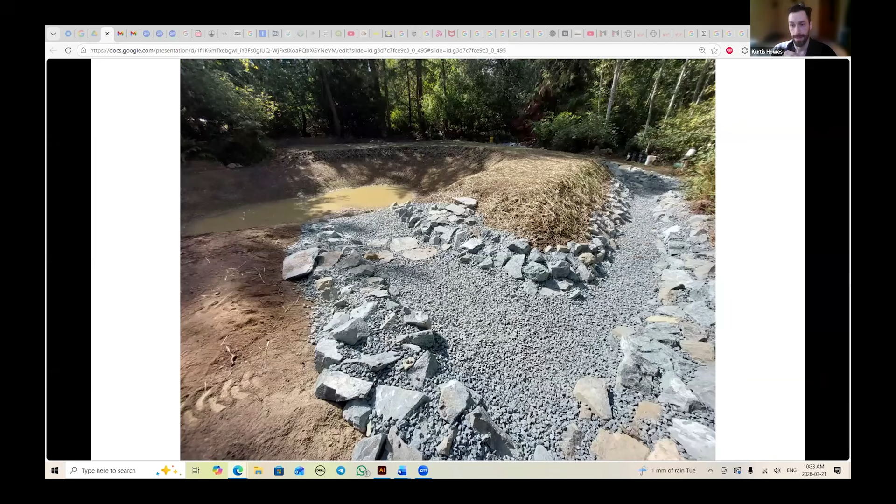Here's a photo of that all complete, and some pieces of flagstone for the homeowners to walk across and up onto the dam if they need to. And of course, some wildlife, which is always good. We had a lot of deer running through there all the time, watching us work, which was fun.

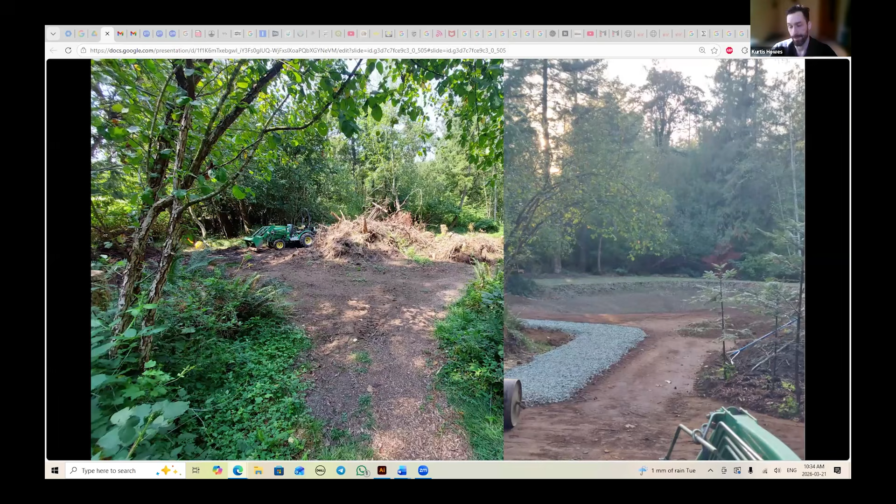But then I realized how powerful water is seeing it flow, and how much force there is even in a small water body like this, and therefore how important it is to do your spillways properly, because it's all like a feedback loop. I'm going to check up on this again, but last time I did, it was running just as I wanted it to.

But seeing that water flow through your system, I'm glad we took the time to do this properly, because if you don't, then I realized how easily water could cut something out that you put in, or carve earth away and stuff like that.

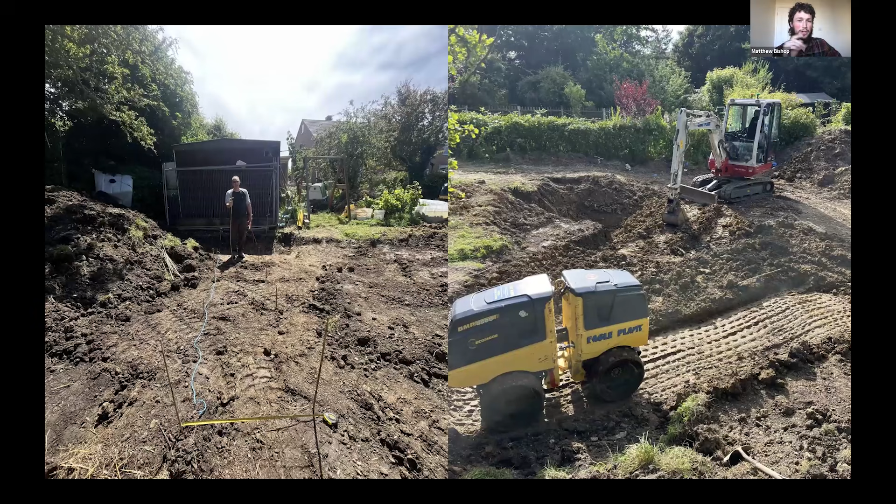So here we are. We cleared off the pond site after doing some test slices and deciding where we wanted to go. You can see we've laid out the key on the image on the left, and on the right, although we don't have photos of us going underground, we didn't go very deep—maybe a meter. Then this is us tracking around and clearing out the inside of the pond site.

I think that's our main shortcut: we didn't go very deep at all because we encountered really intense clay, and we had a two-week time frame we wanted to do this in. Pete, being the client as well as the partner, made the call not to spend tons of time going way down and packing clay that he thought was compact enough.

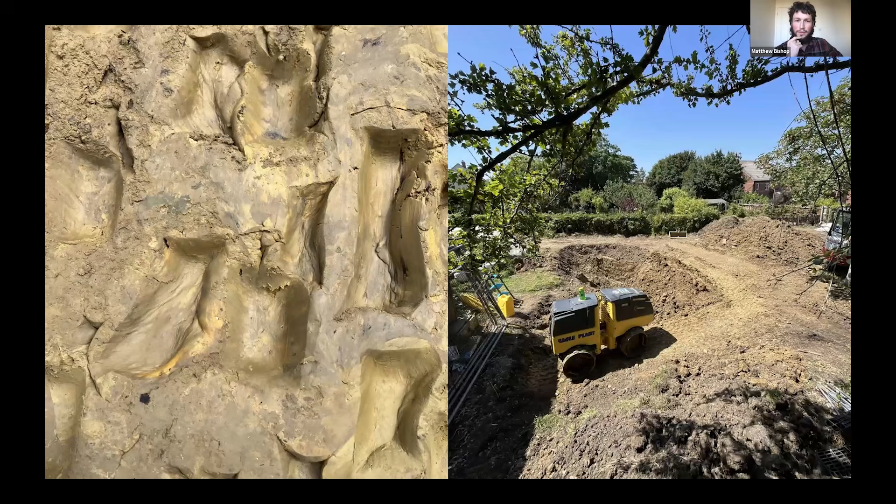As you can see on the left, it was basically 100% clay—like you could nearly use it as potter's clay. The lower we went, it turned into a blue clay, a very rich blue clay, so we felt it was fine. On the right you can see us—we've done the full key down to ground level, and we started going up at the water level here.

Yeah, there we go, sorry. I think these are nearing the end here. You can see we've built up—it's hard to exactly see, but we've come up several feet now.

On the right here we've really started to dig out the inside of the pond. We decided to just keep harvesting material from inside, which became like a very steep pit because the sides were super stable, and that's what we wanted to do. On the back right side there's a shallow sloping zone for an easier in-and-out entry.

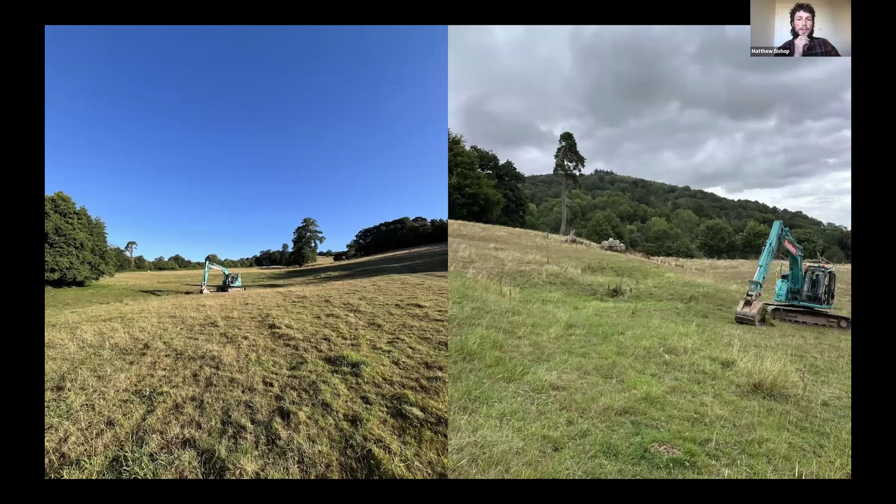If you go to the next slide here, you can see the beginning. These were a couple of the sites that we had decided. This is actually the same site, but we went to 2 different spots and did test slices at 2 seeping springs.

They have a ton of springs on this property, and basically the plan was to catch and hold that spring water, so that we had a nice fresh pool. Hopefully that was going to hold water longer in that space than previously it had, and have the wonderful results that we get from holding water here. So there's a little spring coming out right in this spot.

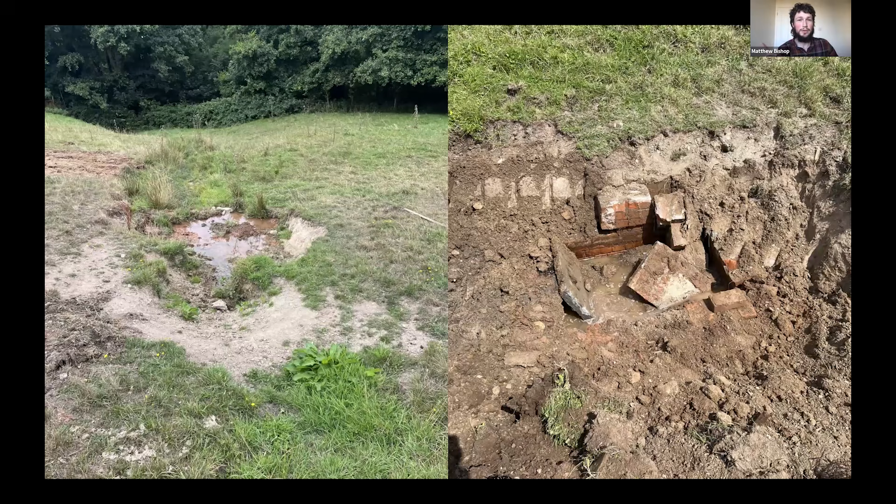So you can go to the next slide here. Also, first time in a 14-ton excavator. That was good fun, that was a lot of learning. Big machine. So yeah, be safe out there.

The image on the left is the little spring that's naturally coming out of the land right here. So this is the project site. The image on the right is, I would say, a couple dozen meters above this spring, and it's a spring box that used to feed a bunch of the houses downhill from here. So we decided to do a little scrape on the upper spring box here, as well as a bigger pond down below.

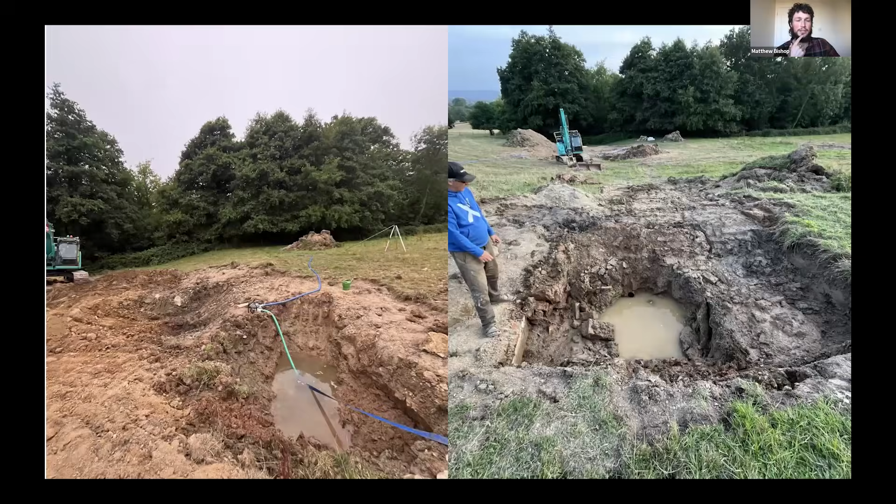So remember these images, these are the 2 sites. And in the next slide, we've started progress on excavating. As you can see, the remnants of the little spring box on the right side. Water is already filling. On the left, we have a sump and a big pump that we're pumping out every day, and you can see that we've started excavating.

Here, the soil was very, very different, very permeable, and fairly homogeneous once you started getting down. The full reach of this excavator, there was no really clear impermeable layer. There was one that was significantly higher in the strata, but that also wasn't totally uniform.

On the left side of that left image, you can see the soil color is quite different than the right, and the soil type really was interestingly different between the left and right side of the spring. On the right side in this image, there was much higher clay content, and on the left it was very dry and very low clay content.

So we decided to import clay because we weren't positive that the clay content we would have would be enough, because the calculations we did around the harvestable area meant we were really uncertain about how much clay we would encounter and how usable that was.

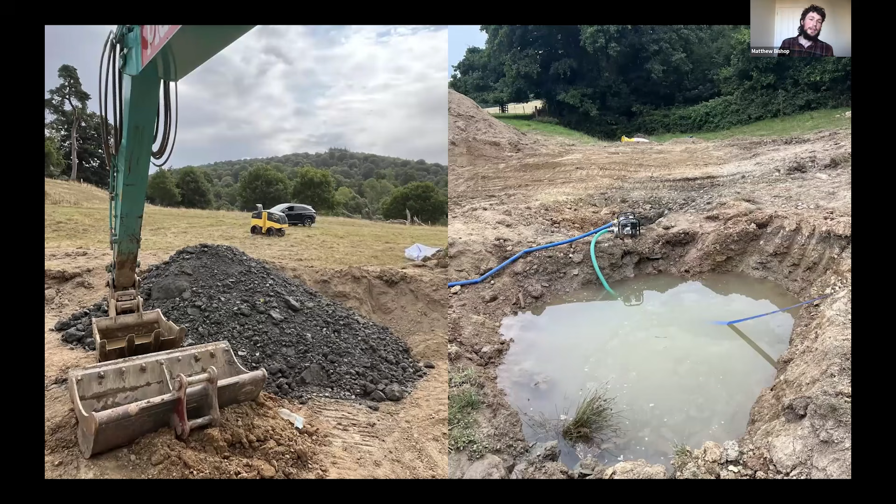So you can carry on to the next slide. That's the delivery. And yeah, working with totally dry clay to get it to that moisture content desirable to build a key with was definitely a challenge. It took a while to figure out exactly how to best do it.

It was very challenging. It was a lot of splashing water around, and it's a lot of trial and error. This project also, we gave ourselves 2 weeks to accomplish, and more if we needed it. But basically, we decided that we would try to do what we could in 2 weeks.

And so there were some reasons for doing that. But I definitely have learned that you want to give yourself a lot of time, and not bite off more than you can chew.

So this sump had a very high flow rate. It would fill pretty much every night, and every day we'd make it bigger, and it would just keep filling. I think part of that was that we created a low pressure zone, so there was an unusually high amount of water flowing in those first few days of exposing this.

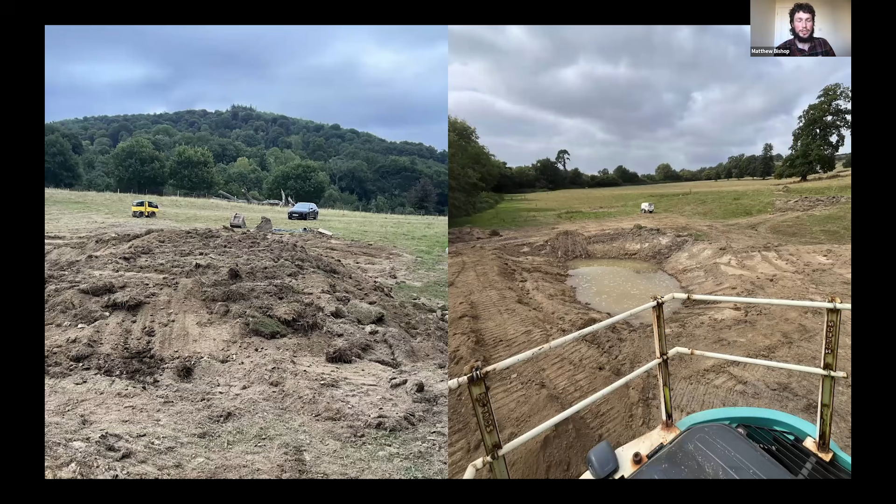But okay, you can go to the next slide there. So this is just an image of throwing over the topsoil after doing a bunch of compacting. On the right, you can see that the pond has filled substantially after just a couple of days of pulling the pump out and excavating the sump area.

And then on the right side of that right image, you can see where the little scrape is, and I think there's some more images of it coming up, but that's the spot right there. So it's a good overview of the site.

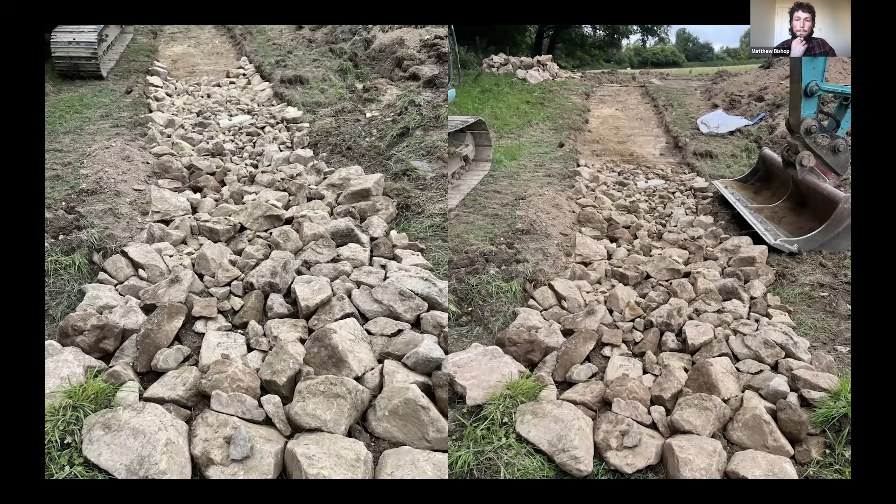This is my first time building a spillway, and it was super satisfying work. It was a full day, but we managed to harvest all of these stones from the soil. That was one bonus we were quite excited about - we were able to sort through the soil and found this wonderful rock, the optimal stone to use for this area, with such a good gradation of stone sizes too. It was pretty awesome.

Cutting the spillway was definitely an interesting challenge, but I ended up being able to get it pretty darn close to level. That was very, very satisfying. Okay, you can go to the next slide there.